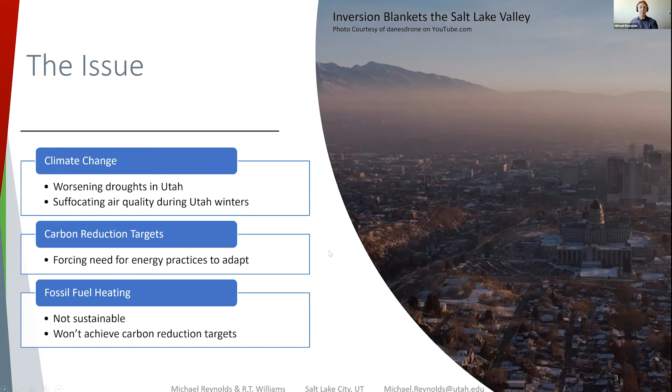So we've focused on cold climate air source heat pumps, which are an efficient variety of heat pumps that use electric energy to both heat and cool. The market narrative around air source cold climate heat pumps has been that they are more expensive and that those do not justify the incremental cost. The Building Technology Office reports an average incremental cost of about $1,350 for a cold climate air source heat pump over a furnace.

The Northwest Energy Efficiency Alliance has published studies from market research showing that decision makers are willing to pay incremental costs for heat pumps, provided they are aware of the technology and its merits, and the simple payback is reasonable. We have found through our work with our partner, GIV Group, that all electric is not more expensive. GIV Group is a local developer that designs, builds, and operates low-income, all-electric multifamily apartment buildings, and their publicly available bid sets show that their electric designs are more efficient and less expensive. Diamond Rail came in at $133,000 less than an identical building with a gas furnace and gas water heaters.

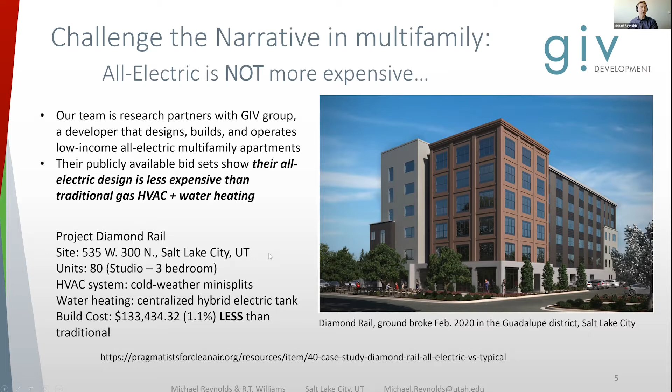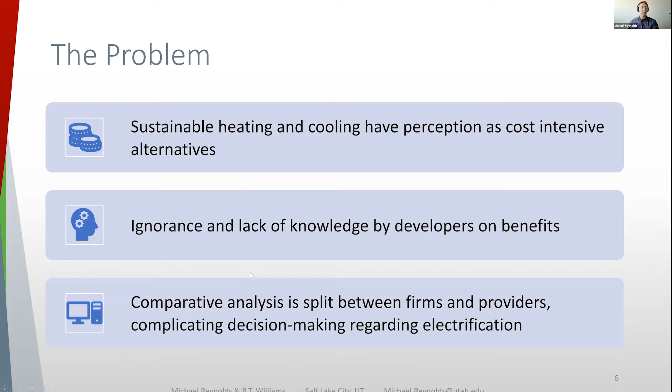The problem we see is that sustainable heating and cooling have a perception of being cost intensive. Ignorance and lack of knowledge of the benefits is leading to a lag in the adoption of this technology, because comparative analysis is split between firms and providers, so they can't make their decision.

Our solution is a consulting service that specializes in electrification strategies, particularly cold climate air source heat pumps and water heaters adapted to the Utah Wasatch Front market.

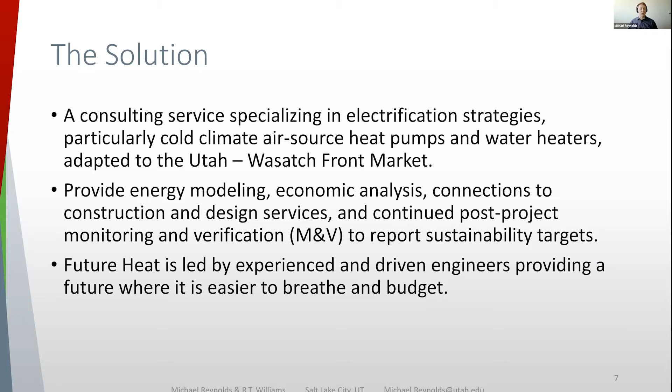We provide energy modeling, economic analysis, connections to construction and contractors, and monitoring and verification services throughout the life of the project. Our business model provides services including conceptual design of electrified HVAC systems using energy modeling and economic evaluation.

We also offer connections to local installers, contractors, and developers, and continued support through the life of the building, including energy certifications and awards. Our price structure will charge a fixed rate for initial consulting and energy modeling, hourly consulting rates for labor on design build, and a tiered subscription service based on the client's needs for continuing M&V.

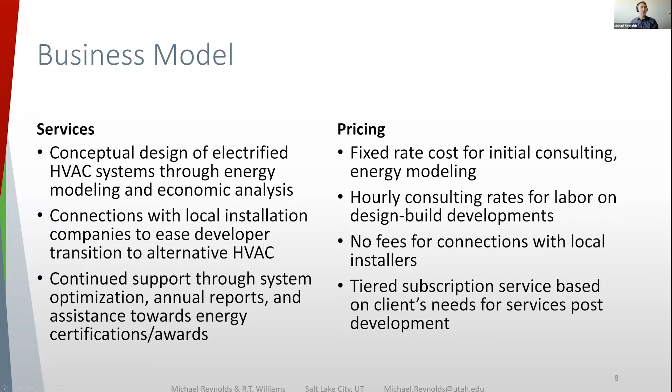We believe we have an amazing market here in Utah. Our real estate market is booming. Research from the University of Utah indicates that about 30,000 residential permits were issued in each of 2020 and 2021, and we see each residential permit as an opportunity to push a heat pump into the market.

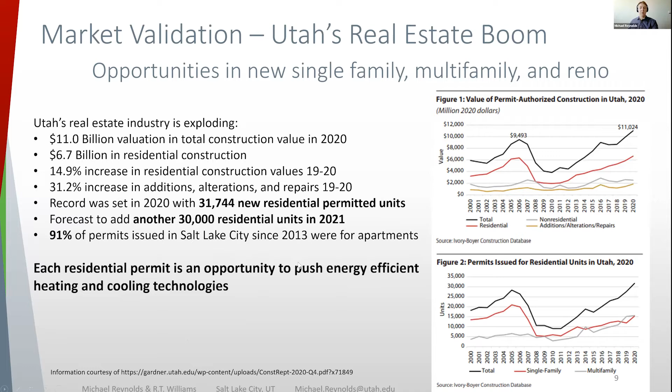We will achieve this by working through our existing partners with the GIV group, the Industrial Assessment Center, which we have on campus doing energy analysis to find more clients, and Rocky Mountain Power, our electric utility, who wants to push electrification in this region. We will work through these existing partners to reach new customers and through professional engineering organizations.

Our competitors are natural gas utilities, for whom electrification is a threat, and our state is very fossil friendly. We also see competition from energy modeling companies who have to be convinced that we bring value to their table. But our advantage is that we fuse economic analysis at every step.

We're asking for $2,500 to continue our travel, achieve the licensure and certifications we need, and for capital for software.

We know that electrification using cold climate heat pumps will benefit city and state officials in their carbon goals. We will all breathe healthier air here in the Wasatch Front. Developers will save cost and streamline their schedules, and low-income owners will pay less in their utility bills. Thank you, we are Future Heat.

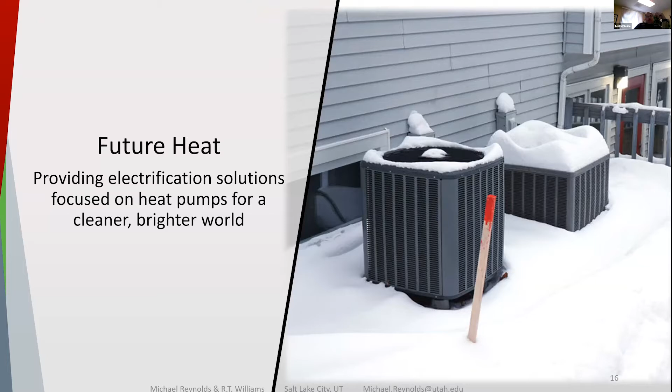This is Ted. I had a question. So your revenue model is that you're going to consult to big developers, individual homeowners, or big commercial buildings. Whoever that is, have you figured out, if I'm an individual homeowner, what's the cost savings versus how much I'm going to pay you? Why would I want to pay you? What's the payback before I make up what I'm spending to have you tell me to put in a heat pump?

Let me show you a case study from my home. This is my home in South Salt Lake, a 1,600 square foot attached townhome. I did this analysis for my home, and my payback is about 12.2 years. I live in a house with 2 walls that have essentially infinite insulation, so I only lose heat at the front and the back because I have 2 attached neighbors.

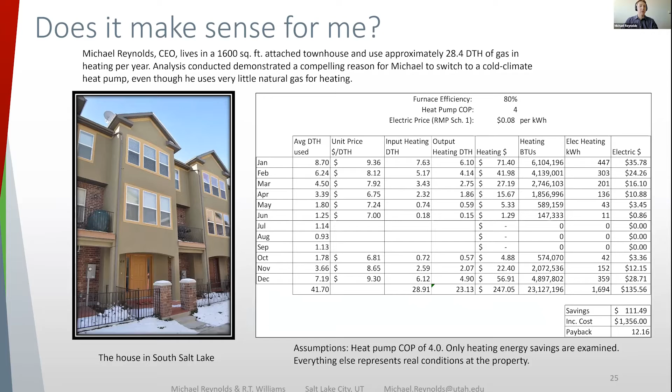For me, that results in a payback of about 12 years, but I don't use very much gas to heat my home. In fact, homes that use just twice the amount of gas that I use would see paybacks of about 6 years. With a payback of about 6 years, we estimate that we can achieve market penetration of between 20 and 25%, even among detached single-family homeowners. The multifamily market makes a lot more sense because the incremental cost is zero. If we can show developers that they're saving money by electrifying their buildings, they're all going to want to go for this. It's just the lack of knowledge that prevents them from implementing.

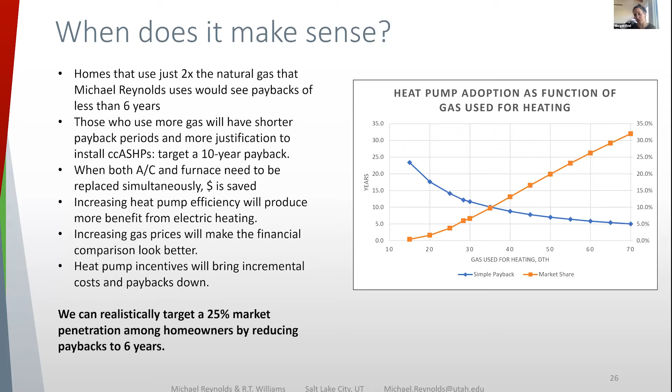I guess my main question is, it seems like there are a lot of different areas that you're starting off with. If you were to pick one market that you feel you could make the greatest impact with, where would you start in order to gain the biggest product market fit and actually get into the market?

I think we would start with the multifamily market because we have a strong relationship with Giv Development. They have case studies publicly available. If you go to Pragmatists for Clean Air, you can find their full construction sets for an identical building that they bid and spec'd through their professional firms, showing their multifamily building was less expensive. We know developers are motivated by initial costs and getting their investment back as quickly as possible. So we feel it makes the most sense to start with multifamily because that's where most of the building is going, and it makes the most financial sense right now.

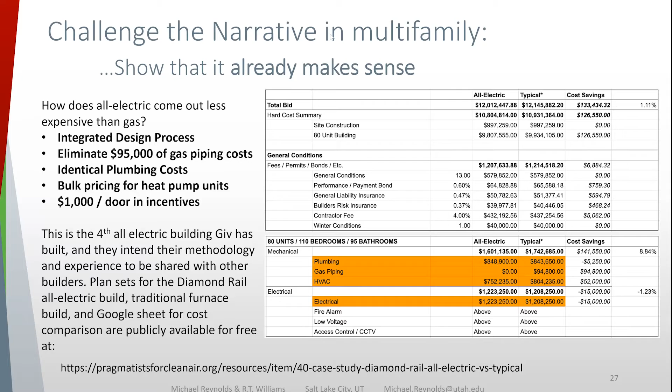Right now we have Azeotrope. Efficiency is a word emphasized throughout the economic and industrial sectors. Currently our global power is driven by crude oil, but crude oil can't even be used without first being refined or distilled. Welcome to the higher efficiency distillation solution, Azeotrope.

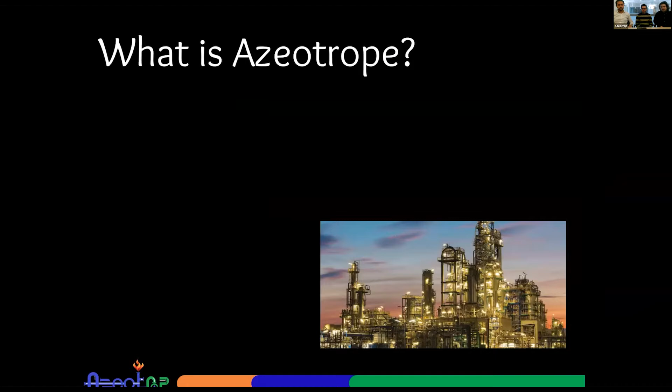Myself and my colleagues have 16 years of combined experience in the field, backing us as we launch this venture. So what is Azeotrope? Azeotrope is a company ready to revolutionize the industry as a whole. We will provide free implementation of our distillation units, and the energy cost reduction will be the profits for both parties. What is distillation? Distillation is the separation of liquid mixtures by controlled increase in temperature.

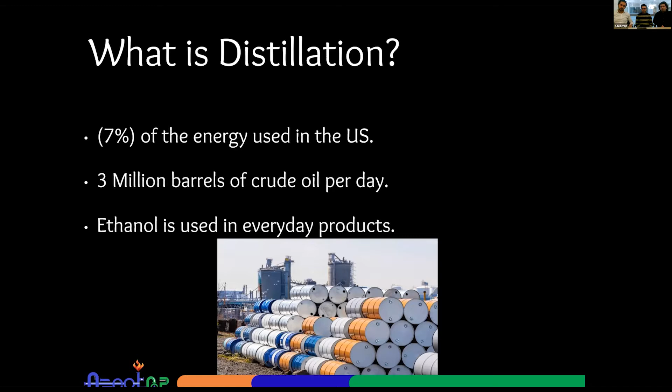It is super energy intensive. In the US alone, it accounts for 7% of our energy use. By day, this is 3 million barrels of crude oil. We can't focus on distillation as a whole, so we're going to dominate the ethanol market to begin. Ethanol is used in everyday products such as fuels, pharmaceuticals, and most recently relevant due to COVID-19, hand sanitizer.

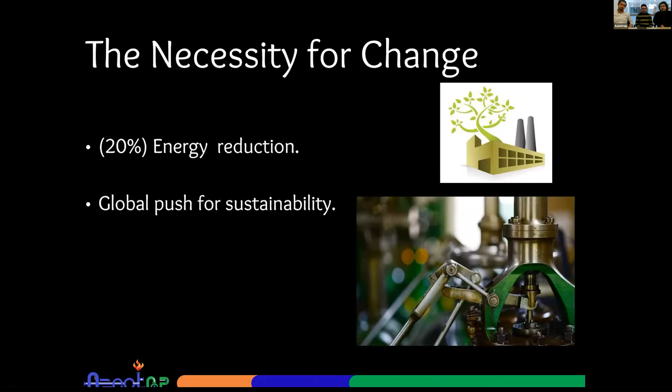So what's the necessity for change? We provide a 20% decrease in energy costs for every distillation process. There's also been a global push for sustainability in manufacturing. Let's put distillation at the forefront. This provides savings for our partners and resources for our children.

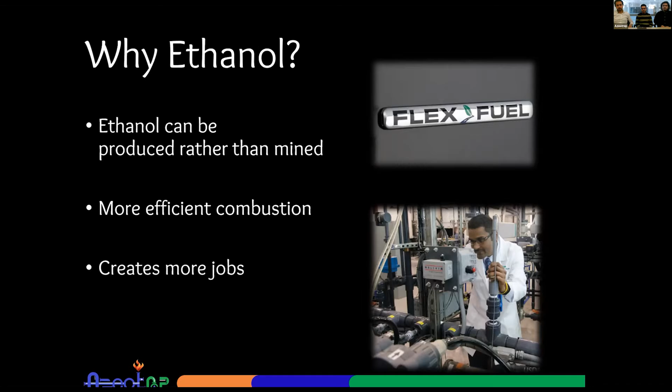Why ethanol, you may be asking? Ethanol can be produced rather than mined, unlike crude oil. Ethanol also provides more efficient combustion. This will create a larger ethanol market, which in turn means creating more jobs. There are also technical reasons to focus on ethanol production, and we can highlight them by looking at the traditional distillation of water and ethanol.

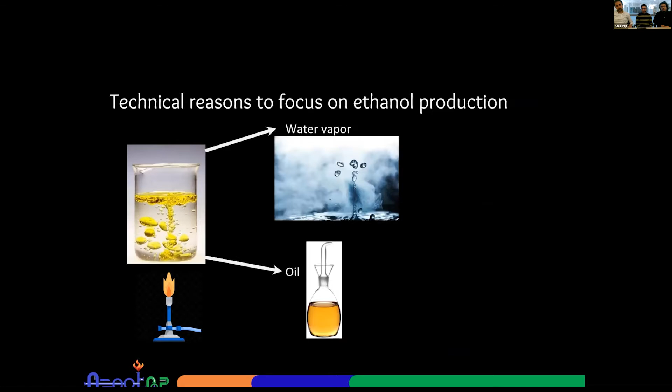Heating the mixture, water will turn into vapor, the light phase, and oil can stay as a liquid, the heavy phase. The situation is different for ethanol and water because they are as light or as heavy, so heating the mixture keeps them in equal proportions in both phases. In other words, there is no change when boiling, or they form an azeotrope, from the Greek.

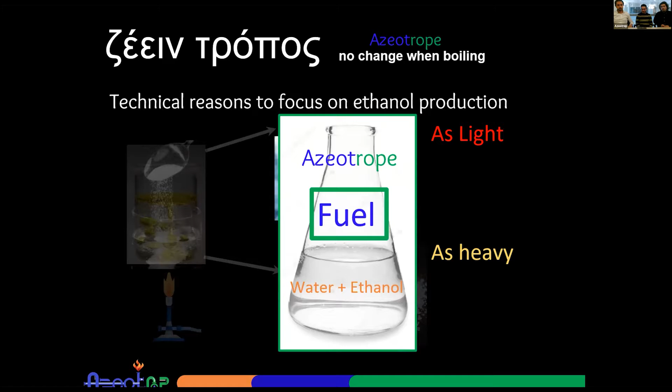As Victor highlighted, ethanol can be used as a fuel, and that's why we need to separate water from the mixture completely. In the current production process, corn is fermented and a water-ethanol mixture is formed. Separating water from ethanol is a complicated two-stage distillation process. That's how azeotrope changes the game, reducing the two-step distillation process into one single stage using our nanomaterial technology, saving up to 30% of the energy used in distillation.

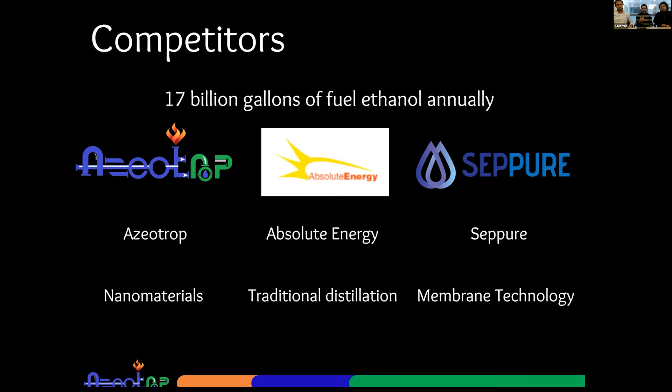The fuel ethanol market in the US is huge, producing an estimated 17 billion gallons. People in the market use traditional distillation or rising technologies such as azeotrope and Seppure. Our deal to the market is simple: we will give them our units, and for a fraction of the energy reduction cost, we will make our revenue. This is estimated to be $40,000 US per month for every unit sold.

So what about our market strategy? With a competitive advantage of being greener and more efficient, we intend to monopolize the ethanol production market segment in the US. According to Statista and Grand View Research, this market is assessed to be $35 billion US. We will use this market to penetrate the larger worldwide ethanol production market segment. In the future, we also intend to penetrate other markets in the chemical industry, such as crude oil distillation and water desalination.

Looking at our climate impact, azeotrope reduces carbon dioxide emissions by 50,000 metric tons per year. Think about it: we take a two-step distillation process, make it one step, and reduce energy consumption by 30%. This is where the climate impact comes in.

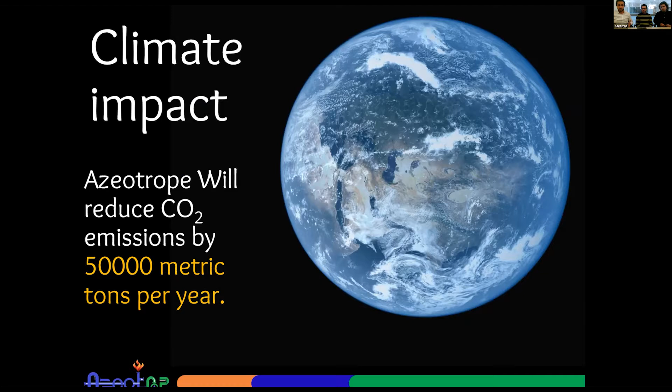So what defines our success? After all, we're a business, and what defines our success is financial stability. Azeotrope needs $3 million US to reach stable and sustainable production of its units. We expect a company value of 6-fold after 7 years of operation. According to our financial study and units being sold, we expect a payback period of 4 years and a company value of $18 million US after 7 years of operation. This number will be increasing exponentially in the years to come.

So what have we already done? We've already won a pitch competition here at the University of Utah. We've also been featured in a prestigious publication, Innovation at the U 2021. We're also in the process of drafting our patent applications with the center here at the U. So take your stake with us today, and let's save the planet one drop at a time. Azeotrope.

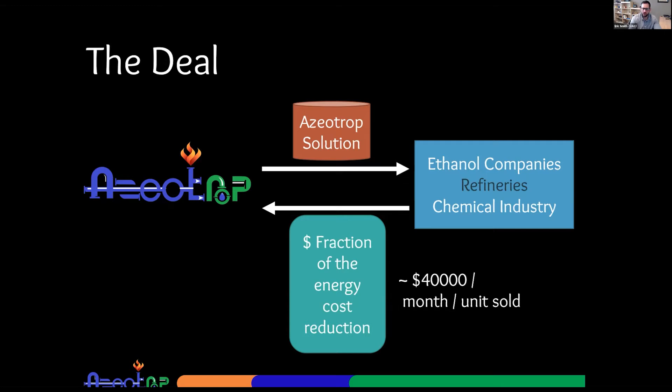In this particular 1 minute, the first thing that I'd like to accomplish is we got to get a picture of everybody, because it's almost 3 years into Zoom meetings, and we're still doing this. And we've learned that when we get pictures of everybody, just randomly snapping one or doing a screenshot doesn't work. So what I'll ask is, if you're comfortable, flip those cameras on. It's like having power, when I can go like this and things happen on my screen. I love it. Okay, Casey's going to be ready with the good old camera trigger finger, and we're going to count to 3. You can give me a big smile. You can make a funny face. You can do whatever. Yes, yes. Peace signs on the count of 3. Ready? 1, 2, 3. I like it. Very nice. Okay, and you are more than welcome to remain on camera or flip back off, whatever keeps you comfortable. I'm just blown away. I think this is the first time in 3 years of doing this where I've asked people to do that, and everybody was ready to go with their cameras on, looking good.

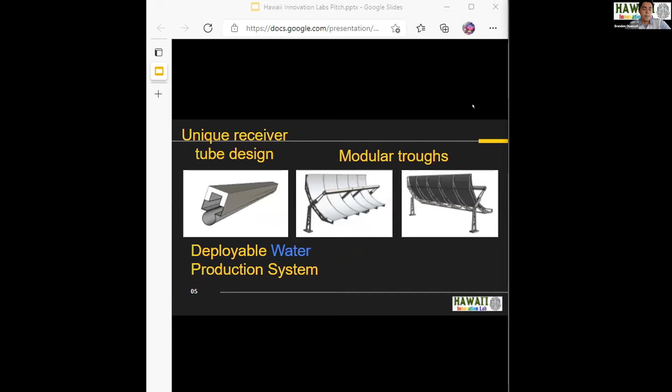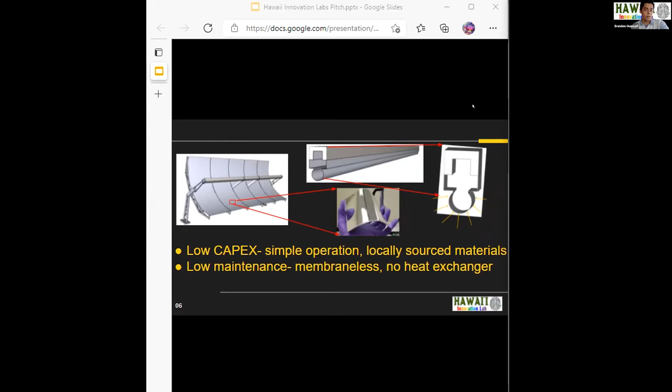We propose a system that will generate water for these refugees, all while being affordable and feasible for camp administration. This system is deployable, allowing for a quick and easy setup wherever it's needed. This system also has a low price point and low maintenance costs, meaning that water production is within reach for refugees. And now, introducing Water for All. Our product is a parabolic trough solar thermal desalination system, where the water evaporation takes place inside a uniquely designed receiver tube, and the vapor is condensed by passing it through a saline water reservoir, generating potable water. The design allows passive heat recovery from the vapor and brine without using any heat exchanger.

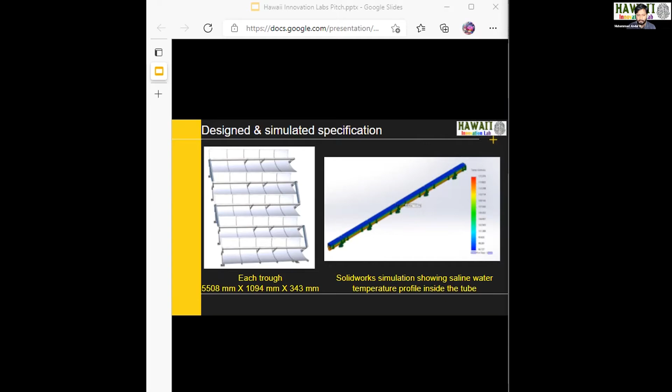A 5-trough plant is designed to produce at least 1,000 liters of potable water a day at 25 liters per square meter of reflective surface for solar irradiance of 4.8 kilowatt hours per square meter a day. The specific water productivity of the system is 5.2 liters per square meter per hour, which is 40% higher than the average specific water production of conventional thermal desalination systems such as MED and MSF.

Our customer segments are coastal refugee camps and humanitarian organizations. We've actually interviewed over 50 potential customers, and many of them have expressed interest in using our product, including the Rohingya refugee camp, whose manager expressed interest in not only a partnership, but also in providing land for the pilot project.

The total available market for solar desalination is $1.84 billion, with a 36.6% share of solar thermal systems. Our serviceable available market is approximately $736 million. Our estimated serviceable obtainable market is $36.8 million per year, which is 5% of our SAM. Unlike most of our competition, our system has no recurring costs. It's entirely off-grid, and it's easily deployable, being able to be set up within a day.

Competitors in this industry compete on the fronts of production and price. And as to be expected, high-cost systems produce large volumes of water, and low-cost systems produce low amounts of water. The gap in the market is right here. There are no low-cost systems that are also high producers. And this gap in the market is exactly where Water for All is positioned, costing as little as $3,600 to consumers and producing 1,000 liters of water per day.

Our profit margin per unit will come out to $1,200. And if you'd like to know more about this number, I would be more than happy to talk with you about it. Our revenue model is sales in North America and Europe and licensing in Asia and Africa. We plan to charge 20% royalty, generating an annual licensing revenue of $30 million. Our estimated annual income from sales is $6.8 million. And in the first 10 years of commercialization, we estimate to capture the serviceable obtainable market of $36.8 million.

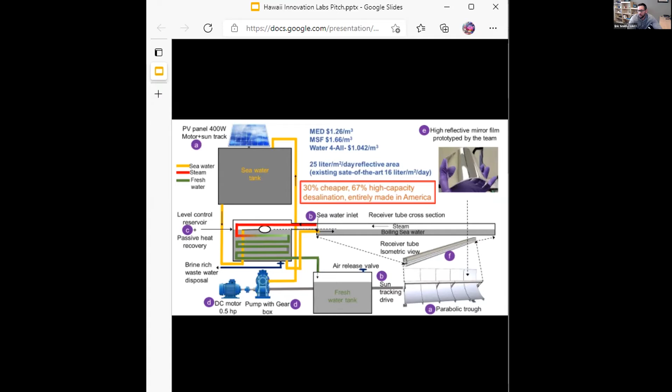All right, and that's all the time we have for Q&A. Well done, Hawaii Innovation Lab, and we're going to give 1 minute for the judges to write their notes.

And I will give you another dad joke. And I like this one. This one's real bad. So what do you call a factory that makes okay products? A satisfactory. Huh? All right. Well, I saw the Hawaii Innovation Lab guys laughing. That's got to count for something, right, judges? So okay. Very good.

All righty. Welcome and thank you so much for having us. We are Revolute Robotics, and we make inspection robots for inaccessible places. Robots have many advantages, from speed, accuracy, and mass data collection. But what you may not know is that robots have flaws too, specifically in the indoor environment.

If you've ever flown a drone, I'm sure you can relate to getting 15 minutes into your flight before the controller starts beeping at you asking for a battery swap, thus significantly decreasing the distance of each mission. This has happened to me personally many times when I'm trying to take video and can't fully complete what I'm trying to do. What's more is that they are extremely difficult and dangerous to fly indoors and typically require a skilled operator with a stack of certifications larger than a phone book to do so successfully.

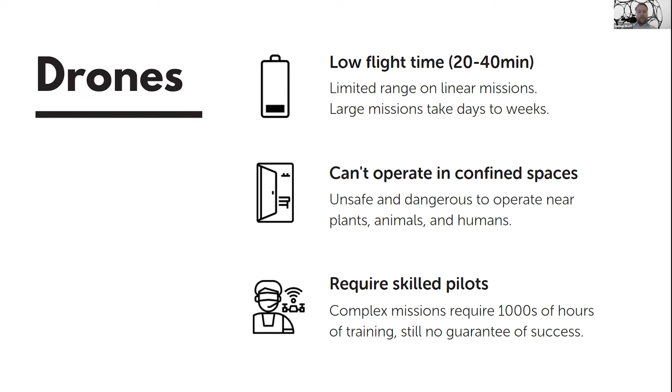Rovers, on the other hand, present considerable improvements to operating time and ease of use, but this comes with its own set of drawbacks. Their large size and low mobility means that any obstacles or uneven terrain greatly limit the robot's areas of application. Our solution is to offset those robots' limitations by combining their capabilities.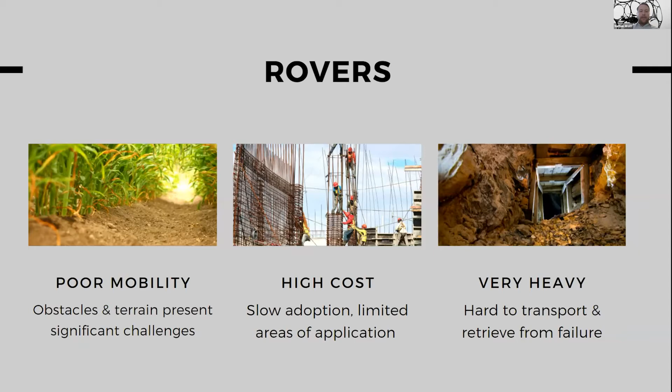Our robot's spherical design and ability to both roll and fly will allow it to safely operate in confined spaces to collect data where other robots cannot travel. The ability to roll gives it an operating time of up to 10 times that of a typical drone, which significantly increases the distance and duration of each mission.

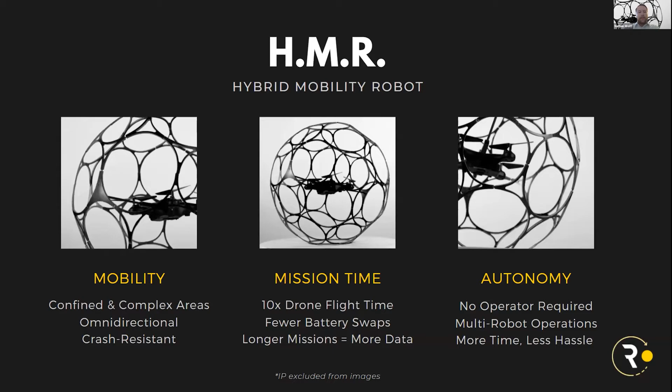Our robot will also feature fully autonomous operation to eliminate the need for human interaction. And you might be wondering how it's done. Simply put, our robot is comprised of a multi-rotor mounted in our patented stabilizing unit inside of a protective shell. It can be equipped with any mix of cameras and sensors to collect mission-specific data for different industries.

Although many industries can benefit from this product, the most immediate demand lies within the energy sector, with up to 30% of a building's energy expenses being wasted on air leaks alone. It's estimated that around $2.9 billion are lost every year due to duct leakage. Our robot is the perfect solution to solve these challenges.

Because our robot can switch between rolling to save energy and flying to travel vertically, it can navigate places that are off limits to any existing solution. Equipped with a thermal camera, it can identify air leaks and other anomalies that waste energy and contribute to harmful greenhouse gas emissions. Not only can it detect leaks that are otherwise undetectable, it can also repair them by using a sealant spraying mechanism. Here's a short video to illustrate how it would maneuver through an air vent.

Our robot allows us to detect leakage much more effectively than any existing solution. Repairmen with thermal cameras have to scan room by room. Retractable cameras, also known as snakes, that can be pushed through the vents, have very limited reach. And rovers can only travel one floor at a time, provided there are no gaps in the floor. But our robot is able to scan multiple floors at a time fully autonomously.

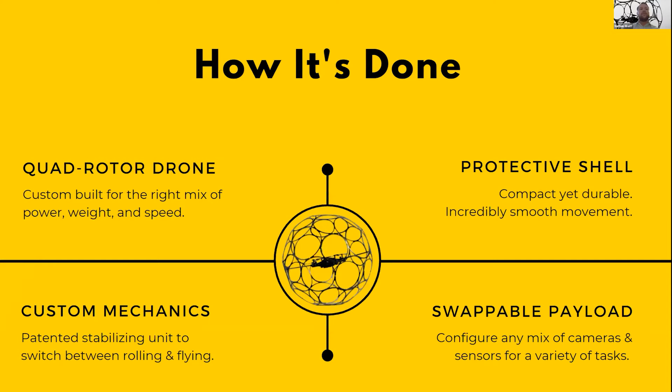Perhaps I missed it, but what would one of these systems cost, or what's your ultimate price point? Yeah, so the cost of production is around $2,900, and the sale price we would be going for is $4,800, with a data subscription of $1 per mile autonomously through the ducts, and a service warranty of $300 per year. You can buy it all outright as a direct sale, one-time production cost, or you can do a lower upfront and shorter sales cycle and make payments.

All with a monthly data subscription and service warranty.

How does that compare to current options like the snakes and so on? Our solution is the only autonomous one, so you wouldn't need a repairman to come and actually inspect the ducts, and they usually charge around $75 to $150 per hour depending on the company. With our robot being autonomous, it can go through the ducts by itself, and it'll have a sealant spraying mechanism to patch the leaks.

You wouldn't have to have somebody control it, or is it completely autonomous, like there's no human intervention? It will be controllable on its own with joysticks, like a standard controller. The autonomy would be once it gets into the air duct, then it will be able to navigate and avoid obstacles. So some initial supervision would be needed. And is that built into your pricing model?

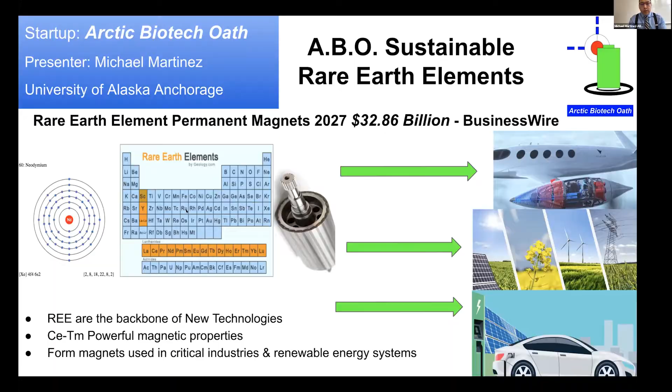Conventional methods, especially current mines and other rare earth element projects such as Mountain Pass, BRAIN Xtractor, and Medallion Resources up in Canada, use acid leaching conditions which may cause acid mine drainage, such as has been seen in the Colorado River watershed. If we keep seeing these methods applied and these spills happening concurrently, we're going to be destroying the freshwater sources of the United States continent.

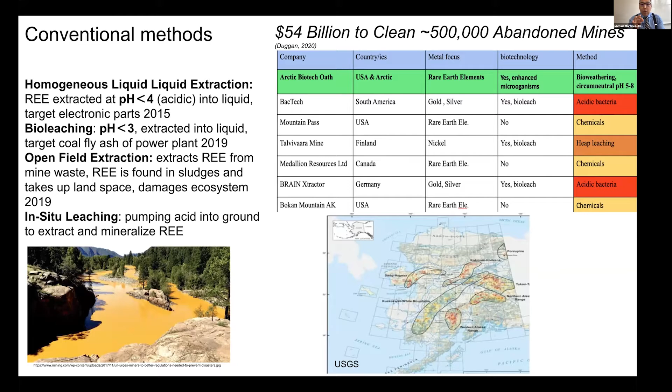So what we're proposing is biomining and bioweathering that operates at pH 5 to 8, circumneutral pH, targeted for the yet-to-be-established rare earth element deposits right here in Alaska in the Arctic. You can see in the corner, our technology actually works: the bacteria grow, proliferate, and extract the rare earth elements from these different mineral feedstocks.

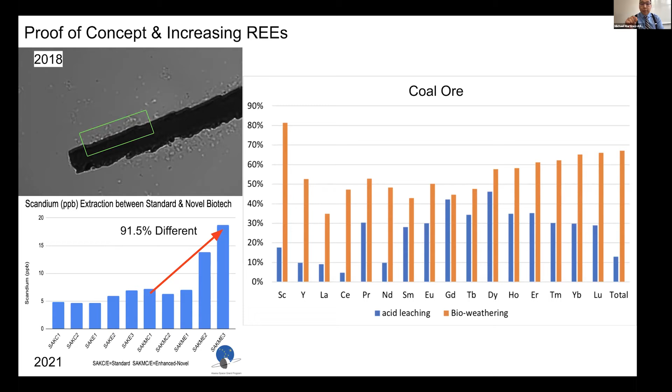What separates acid leaching done by conventional companies from bioweathering is that acid leaching occurs in set acidic pH conditions, whereas bioweathering allows the bacteria to grow exponentially and multiply, and since they are living organisms, they need these minerals to survive even in harsh conditions. Comparing the two, we can see that bioweathering outperforms and is superior to acid leaching methods.

We plan to integrate this into a $3 billion headquarters facility here in Alaska, about 500,000 square meters, to extract, refine, manufacture, and recycle these rare earth elements, with the help of other DOE patents and scientists such as Bhave, Schneidner, and McIntyre, with our biomining extraction method taking ores, tailings, wastewater, and used rare earth elements to make the final rare earth magnet products for US technology industry partners. The goal is to create 3,000 jobs for Alaskans, and to integrate robotics and automation so operations run 365 days a year.

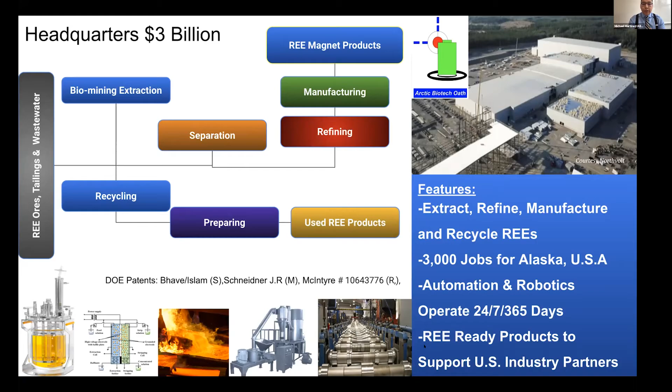So what are we looking at exactly? To give an example, with the new White House announcement, the Buy Clean Task Force is going to be looking to buy American-made products. Where will these go? If we look at the electric vehicle market by 2030, that's going to be worth about $823 billion, and the aerospace industry by 2030, about $1.25 trillion.

By establishing one-on-one collaborations with, hopefully in the future, these US technology partners, we will make sure that their magnets are up to grade, don't degrade in their actual devices, and that these products are made sustainably.

I saw Cody there earlier on deck. Hi, I'm Cody, engineering master's student at the University of Washington, studying ultrasound at APL Center for Industrial and Medical Ultrasound. My teammate Lloyd is a master's student at the Foster School of Business, studying technology commercialization. With our team, Ultropia, our mission is to foster global accessibility to sustainable laundry by using ultrasound technology to make laundry appliances significantly more efficient.

There are 5 billion people who still wash clothes by hand. The US is one of a handful of countries where washers and dryers are standard issue. Even die-hard environmentalists don't give up their machines. The problem is our current appliances: they're resource hungry and highly polluting. US washers and dryers produce 179 million metric tons of CO2 annually. That would take half the trees in the US to keep up with.

We've spoken with people all around the world about their laundry needs. Extreme poverty and a lack of infrastructure are huge barriers for many, but surprisingly, even developed countries have limited access to washing machines. Our team's business lead, Lloyd, has family in Fiji that need an entire day for the labor-intensive task of doing the family's laundry.

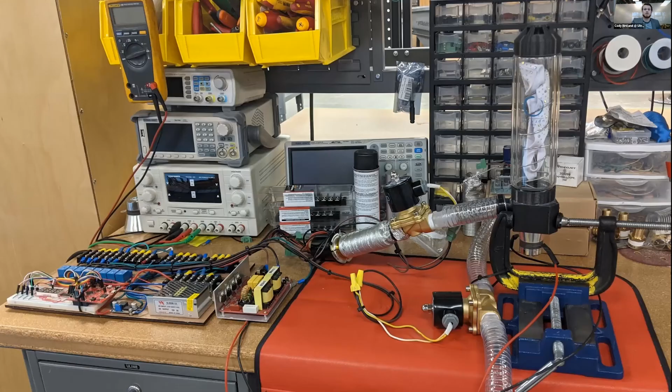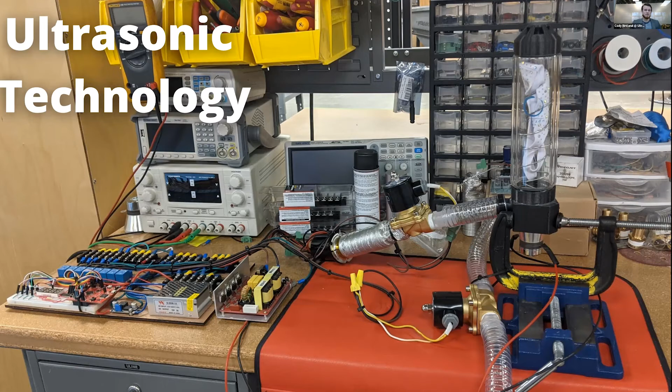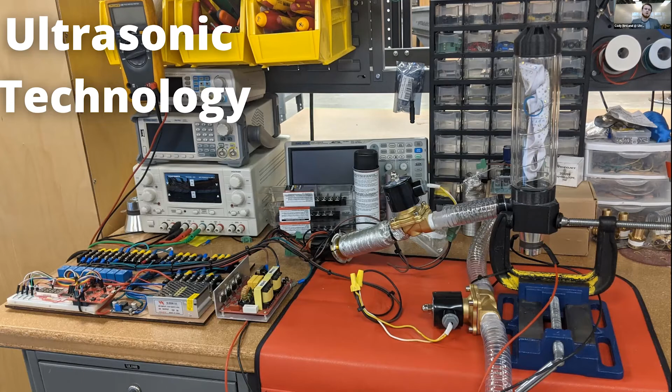Our solution uses ultrasound technology to wash as well as dry clothes. Cleaning works by using ultrasound to drive the creation of vacuum bubbles that, upon collapse, gently expel dirt out of clothing. The drying process uses ultrasound to atomize water droplets, reducing the heat required. We're taking learning from the ultrasound lab and combining it with ultrasound drying research developed at Oak Ridge National Labs to create the world's first ultrasonic washer and dryer. We've translated this research into a tabletop version that uses our technology to wash and dry small items. The technology has diverse applications, and commercialization of smaller versions will support our long-term development.

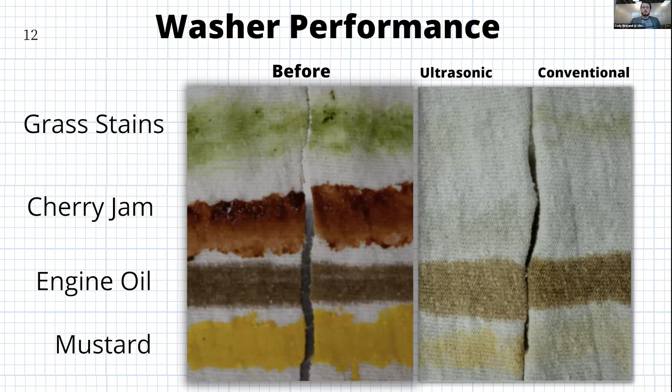We've compared our ultrasonic cleaning to conventional washing machines. As you can see, the results are fairly similar. The real difference is in the resources used. Our bench tests for washing show faster cleaning, less water use, and significantly less total energy compared to a modern mid-market washing machine. For drying, we're building on research from the Department of Energy and Oak Ridge National Labs, which shows drying in 7.5 minutes with 5 times efficiency gains over forced air dryers.

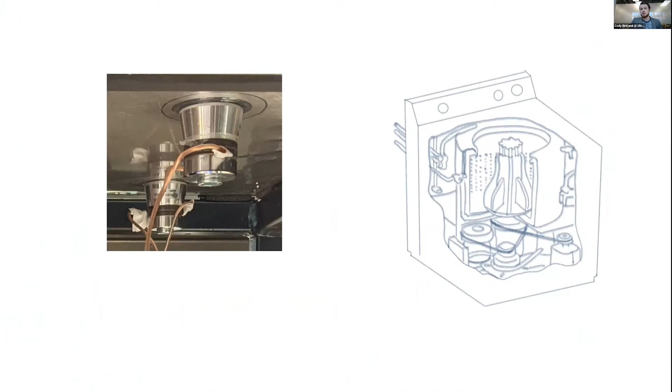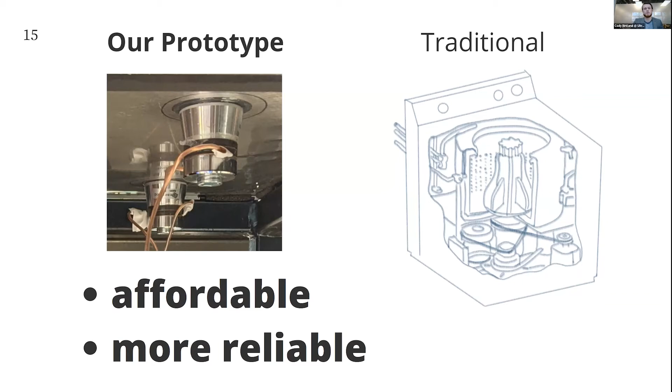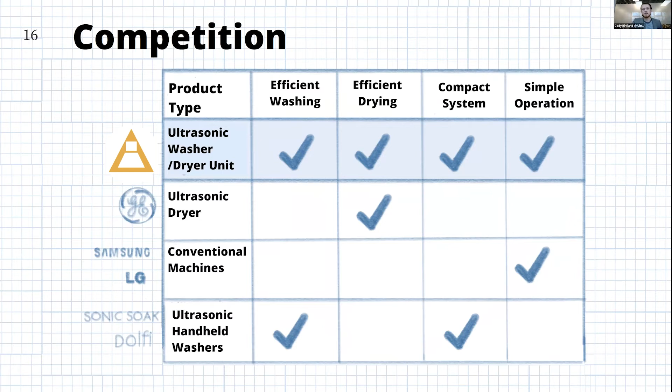This technology uses fewer moving parts, enabling our design to last longer. It also allows us to create a compact, all-in-one unit that will be more affordable to manufacture and ship. High efficiency allows us to offer a configurable water supply and compatibility with a standard wall outlet to foster accessibility for resource-scarce communities. We're challenging GE and Samsung with our all-in-one product that is 1/3 of the size and moves beyond the expensive, damaging rotary drum. Other ultrasonic cleaners are on the market, but our product is unique, using ultrasound to wash as well as dry clothing, saving water, energy, and time.

We're opening up new markets, starting with providing access for the millions of Americans who do not have in-home laundry. Globally, the market is big, $66 billion, growing by 34% over 5 years. We're pushing to get to market in time to meet this surge in demand and prevent the resulting increase in pollution.

Hardware has high initial costs, but laundry is a universal problem. Our plan is to start in the luxury market with high-end consumers who care about their eco footprint and need a compact laundry system for their urban lifestyle.

Our research shows that these consumers would be willing to pay $1,500 a unit to address their needs. From there, we can scale our manufacturing to reduce product cost to around $500, allowing us to sustainably meet the growing global demand for washers and dryers.

We will work with the Alaska Native Tribal Health Consortium to get user feedback, as they have expressed a need for a resource-efficient washer and dryer. We're developing our product at our university's CoMotion Labs, which has the resources to connect us with people to manufacture our product. After gathering user feedback and establishing manufacturing connections, we will launch our product through a crowdfunding campaign.

Commercializing this technology can change so many lives. Laundry appliances are considered essential infrastructure in the developed world, but the current processes are simply not sustainable. Changing the way we do laundry will make hygiene a part of the energy transition and enable a global standard of living we all want to share.

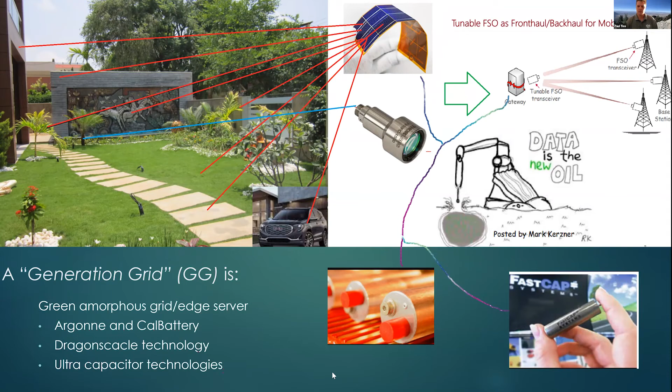Good afternoon, we are the software team, and today we'll be presenting our smart air particulate matter monitoring software. In today's world, air pollution is a big problem, and given that 90% of Americans spend 90% of their time indoors in their homes, we want to address this problem of how to effectively manage air quality inside a building. With current global problems like wildfires and the COVID pandemic, about $1 trillion per month globally was wasted on poor air ventilation. This also decreased the productivity of people, and it costs up to billions and trillions of dollars for the United States.

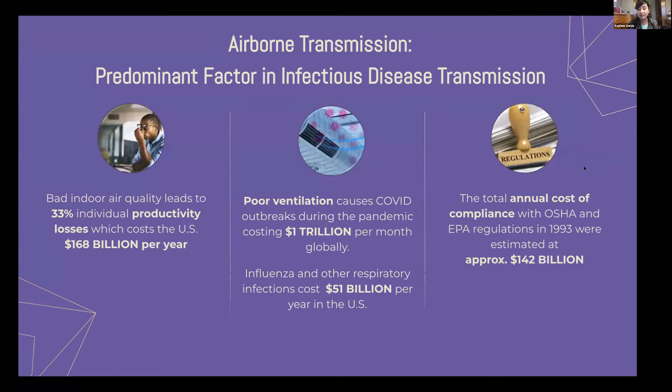To be a little bit more specific, building engineers have certain pain points of figuring out when to let outside air in and when to recycle the air inside of the indoor environments using their HVAC systems. These complex factors are quality of air and figuring out the energy cost of this exchange process of clean air versus dirty air. Our consumer survey focused on 150 potential customers, and a lot of them were also industrial hygienists who helped us with the industry partnership and figuring out what the pain points were. 100% of these participants agreed that they needed a solution for more informed decisions, reduced energy costs, and maintaining a healthy environment for everyone in their building.

So with all the insights we collected from our consumer survey, we also talked to industrial hygienists, and from years of research at the lab of Professor Alexander Mamishev, we are building our solution software. The software combines the power of IoT, machine learning, and AI to build a data-driven intervention method, which can monitor aerosol concentration in real time, and it can alert users when the levels are high. The software smartly integrates into existing HVAC systems and sensors in the building. Data collected is transferred to our machine learning cloud, and users can then access data from the web console or mobile application. Our mobile application and web portal are intuitively designed for the customer to get the exact feel of where the sensors are placed.

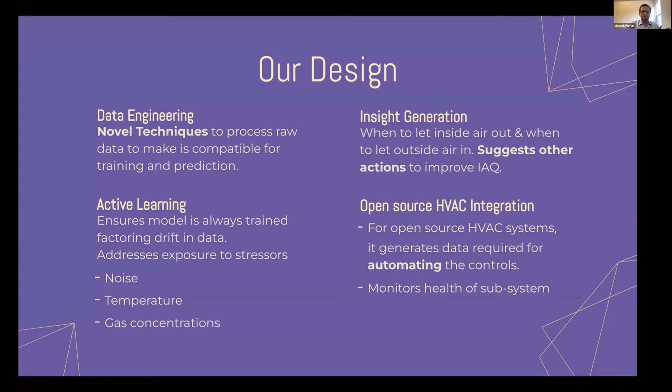The insights which we generate are targeted towards when building engineers should let air in or let inside air out. Also, they will get more suggestions on actions which they could take to make this process more sustainable. We are also working towards integration with open source HVAC systems. There, our target will be monitoring the health of the system, because if a subsystem goes bad, it contributes to large energy consumption and it is not good for our environment.

Also, in the short term, we are focusing only on the software, but in the long term, we are also targeting buildings which don't have any pre-installed sensors. So we have partnered with GQ Electronics to work out a solution, and we will be building novel methods for exposure assessment based on real-time, hyper-resolved, distributed, low-cost sensor networks.

The slide got stuck, sorry.

Our aim is to reduce energy cost by 20%. We have validated this data through our experimentation in UW School of Dentistry, and initial results are very promising, and we are still working towards improving these numbers. This creates a value proposition for both the people inside the building, creating a healthier environment and bettering productivity, along with the enterprises, reducing their workers' sick days and also reducing the penalties for OSHA and EPA assessments, along with reduced energy costs through the HVAC automations.

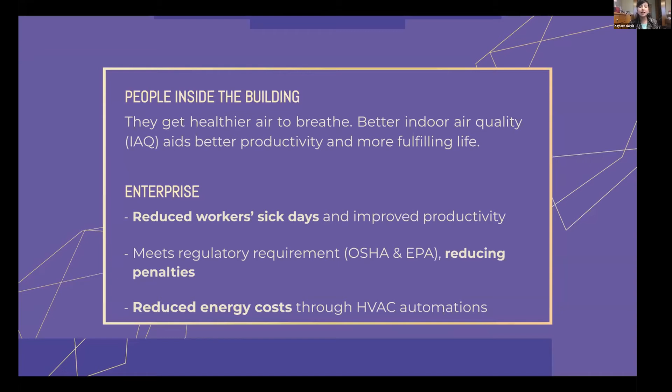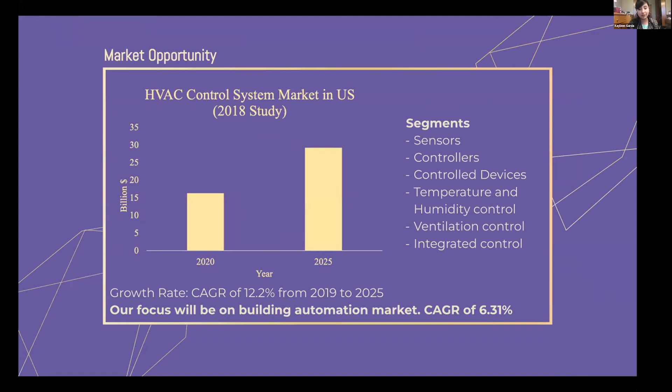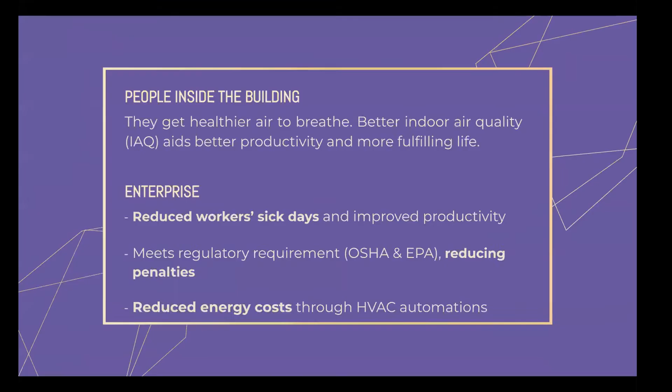Yeah, so there are multiple factors, and we talked about active learning here. Drift can be because of sensor aging, and it also can be because of seasonality. So our algorithms are designed to factor in those kinds of drifts. And Nathan, if you're here, you can take this question a little further. Yeah, so one of the positives of the actual hardware is that it is very cheap to manufacture, so it allows buildings to have a whole system of sensors rather than just one expensive sensor. These sensors are able to communicate through the cloud. And on the software end, we have an AI program that is monitoring these sensors, and it is able to determine when one of the sensors is starting to drift and will recalibrate the sensors.

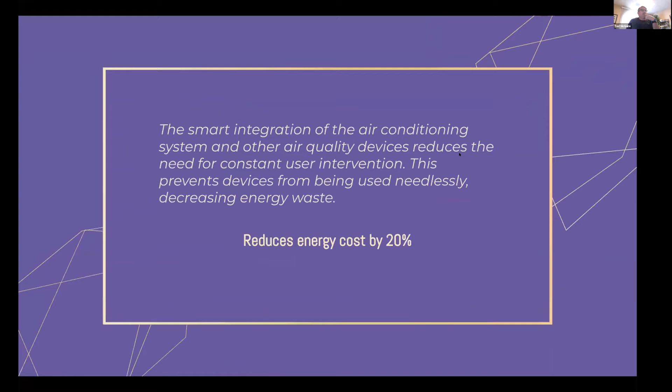Yeah, one thing which sets us apart is the subscription-based model, and our sensors will be very low cost, and also the software can integrate with existing sensors. So companies will not be bearing any hardware cost, and they will be paying a subscription cost based on the number of sensors they have. So it is quite flexible based on their needs. Okay.

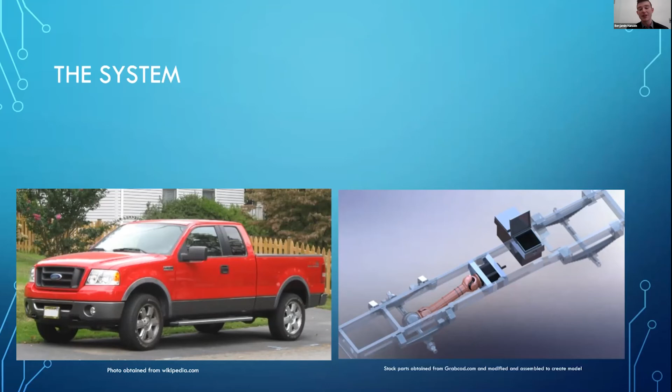And as you can see here in this diagram, I've got a motor hooked up. It simply gets mounted to the frame. One end connects to the engine, one end connects to the axle, and batteries can be mounted in a toolbox in the truck bed. This makes it so that on long road trips, you simply need to fire up the engine. You can drive as long as you want. But on your daily commute, where most drivers use most of their miles, they'll be able to run it fully electric.

Another difference is how we plan to reach the customers. There are currently thousands of dealerships in the US selling used vehicles. We plan to partner with these dealerships to give them a competitive edge as the demand for electric vehicles continues to grow. They'll be able to take the vehicles that come across their lot every day as trade-ins and convert them to electric vehicles. Consumers, in turn, will be able to purchase these vehicles and possibly even receive tax credit to help offset the cost.

Now, of course, there is competition like with everything. However, the competition is a little different. Obviously, the Tesla and Nissan Leaf have a much higher price tag. And other conversion kit companies, such as EV West, target more towards the do-it-yourself car guys who are building hot rods or want a project. An example of our system, on the other hand, would be a $4,000 F-150 with the $4,000 conversion kit, totaling an $8,000 electric truck. It's obviously going to appeal to a different demographic than other EV companies. On top of that, as a side bonus, the combination of the engine and the motor will add performance to the vehicle, giving it even more appeal to customers.

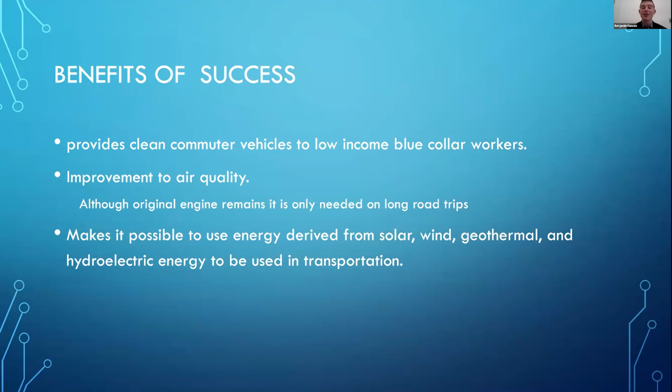The great thing is if we're successful, we'll be able to provide clean commuter vehicles to low-income blue-collar workers across the country, improve air quality, and make it possible to use energy from solar, wind, and geothermal in your everyday transportation.

Another advantage that helps us over other large startups is that it relies on existing technology that's relatively simple. After we build our first prototype, we simply need to find partnerships with dealerships, and then we can start shipping them the hardware. I know this plan has enormous potential, and if it succeeds, it will provide people all across the country with access to affordable electric vehicles.

And that's all I got. So I guess we can go to questions.

Great, thank you, Benjamin. Questions from the judges? I'm wondering, Benjamin, have you tinkered with trying to do any of this stuff on an old used car right now?

That's sort of what I'm working on right now, building this prototype. I want to start with F-150s and Ford Rangers, just because they're very common. It's not completed yet, I'm still in the design phase, but eventually I'm getting my Ford Ranger to be built fully electric like this.

You're gonna add it to your own Ford Ranger? Oh, cool. When do you plan on trying to do that? Just wondering. It'll be over the summer. Oh, this coming summer? You'll have to take a picture. All right, let us know how it turns out.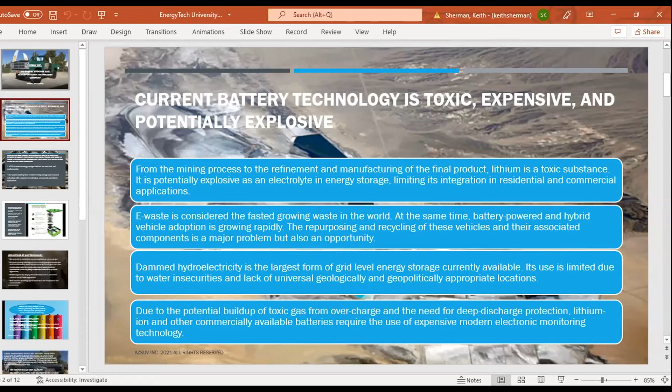I've got a joke prepped, so I'm going to keep at it until somebody yells at me in the private chat. This one's pretty short, simple, and sweet: I don't trust those trees, they seem kind of shady. It's my dad joke.

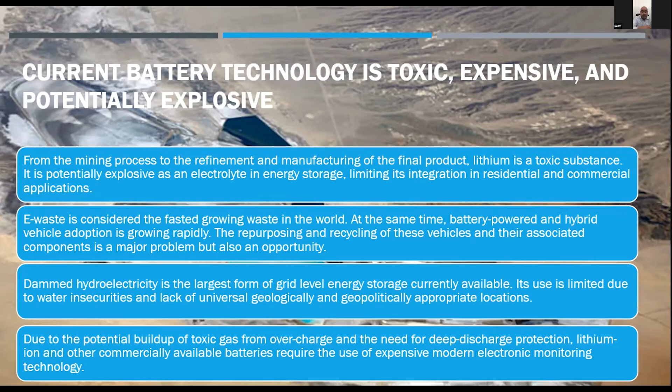So who could benefit from this technology? Anyone who utilizes modern transportation technology could be positively impacted. What we are developing is an aqueous sodium ion battery technology, which is non-toxic and non-flammable. In addition, we are creating patent pending technology: shear resistant and structural energy storage technology for individual, consumer, and military applications.

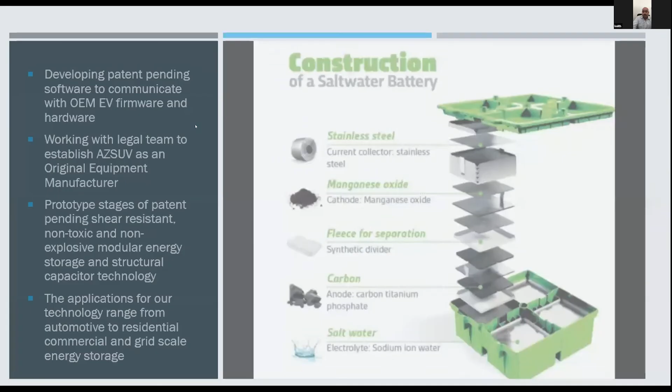This is an example in construction of a saltwater battery, similar in construction to a lead acid battery, but without the toxic elements. We're developing patent pending software to communicate with original equipment manufacturer firmware. Our legal team is establishing AZSUV as an original equipment manufacturer for the auto industry, and we are currently in the prototype stages of our shear resistant, non-toxic, and non-explosive modular energy storage and structural capacitor technology.

So where and what are the types of applications for the technology? The application for our sodium ion technology can range from a home system to grid scale energy storage. For grid scale energy storage, the application I've found is a salt cave. Salt caves are currently used for petroleum and natural gas storage, but we could either create new salt caves or utilize existing ones to store our batteries. It's scalable from a small home unit, and with the shear resistant technology, the applications can extend to automotive as well as military uses.

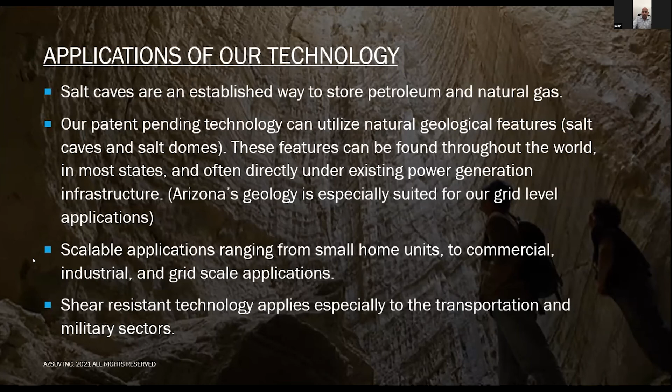There are some companies right now producing sodium ion battery technology, but it's still very much in the developmental stage. One company, Blue Sky Energy, does have commercially available products, but they are not available for the next 6 months to a year.

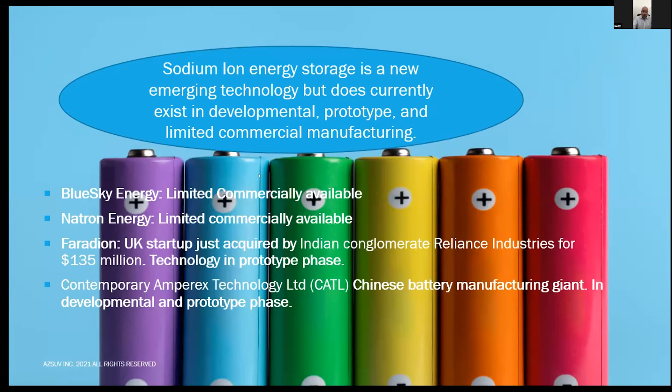So the novel application of this technology is the automotive sector. What AZSUV currently does is identify vehicles, primarily Ford Broncos and Ford Mustangs, and we remanufacture these vehicles, currently with internal combustion engines. However, we are looking to transition towards electric vehicles by utilizing existing battery and electric vehicle technology found in vehicles like the Ford Focus, the Ford C-Max, and Teslas. The reason Ford products have been identified is that the electric vehicle components can be acquired at a fraction of the cost of new vehicles.

And the structural battery storage—think about the panels of the vehicle. We're looking to replace the panels with structural energy storage capacity, so the panels themselves are not only batteries but also designed for safety reasons, for impact resistance, where with shear resistance, when the batteries are impacted, they actually get stronger.

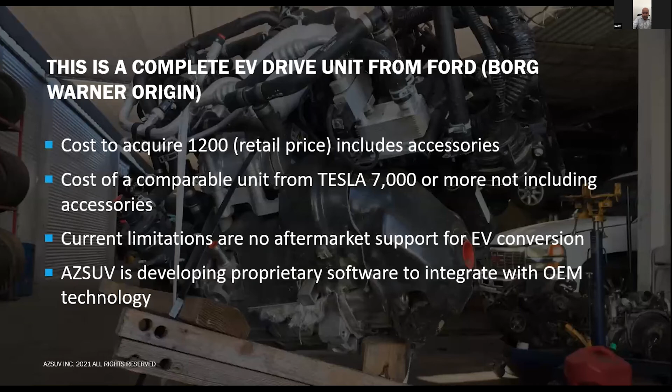This is an example of a drive unit from a Ford Focus Electric. The engine, transmission, everything is there, and it can be had for $1,200, whereas comparable Tesla units are $7,000 or more. So right now we're building essentially brand new internal combustion engine vehicles for $10,000 to $15,000 per unit. When we look to manufacture these vehicles with new electric drive components to integrate our battery technology, we're looking at a price point of $45,000.

When it comes to the actual locations where we want to be, we've looked at several historically manufacturing sectors like Baltimore and Newark, New Jersey—places that still have the infrastructure and access to talent, but are in an economically deprived situation that a large energy manufacturing facility and project like ours could help revitalize.

So I'm an undergraduate student pursuing a degree in information science and e-society at the University of Arizona, with a long history in automotive manufacturing and fabrication. As for my team, I'm still looking at bringing in additional folks. I have some people on board in an advisory capacity, but they are not currently students.

So that is AZSUV and our patent pending battery technology, scalable from everything from a home setup to commercial, automotive, on up to grid scale energy storage. So thank you for your consideration.

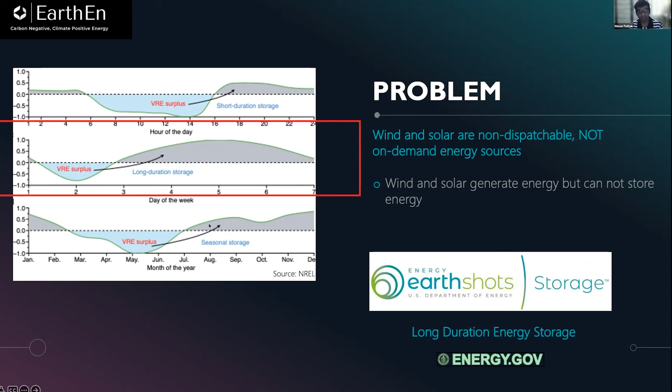How do we solve it? Welcome EnergyPod, EarthEn's patent pending carbon negative to neutral technology that takes excess energy from the grid, stores it, and dispatches it back to the grid for longer durations. I start from 6 hours plus when I say longer duration, but we can go all the way from 10 hours plus to 24 hours. Highly scalable and highly modular, with no geographical or geological constraint in deployment of EnergyPod. The levelized cost of storage that we target is $40 per megawatt hour, compared to lithium ion in 2025, which will be $100. We sell EnergyPod at 1 megawatt capacity for $1.3 million with a 30% margin.

What is EnergyPod? Double-clicking into it, you have 2 modular systems. One is called Energy Conversion Plant, or ECP, that sits on top of HPS, heated pressurized storage. ECP's job is to convert stored energy back to electricity - this is where the patent pending IP comes into picture. HPS's job is to store energy in the form of heated, pressurized, supercritical CO2, which can be stored underground for gigawatt capacity or on the ground for megawatt capacity.

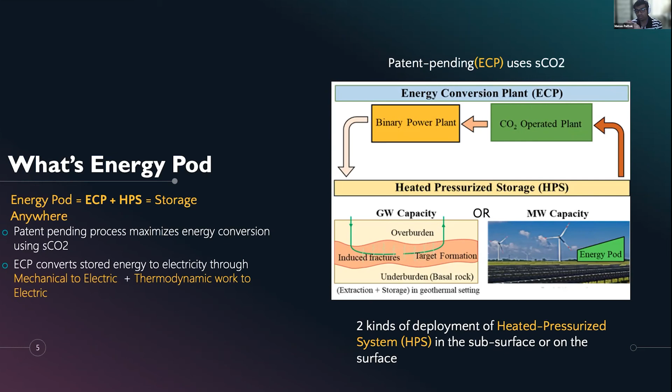It works very easily. At 12 p.m. at noon, when you have excess energy, give it to us. We will store supercritical CO2, pressurize and heat it inside the pod, store it for you, and then give it back to you, say at 11 p.m., by our patent pending conversion technology.

Market opportunity: the overall global renewable energy market is $1.5 trillion TAM by 2025. We focus on the beachhead US energy storage market, which will be worth 8.5 billion by 2025. Long-term opportunities come as entire states in the United States are converting and adding LDES, long duration energy storage, to their portfolio, and short-term opportunities come from companies like Google and Amazon bringing in the technology so they could be 100% renewable and achieve their 2030 vision.

Revenue model: we sell energy storage as a service to utility providers like SRP, to enterprise customers like AWS, to solar and wind farm developers, and last but not least, CO2 capture plants, which are very power hungry. The second category of revenue stream will come from capacity market and ancillary services. We are already talking to a local utility provider, and this is all backed by customer discovery calls.

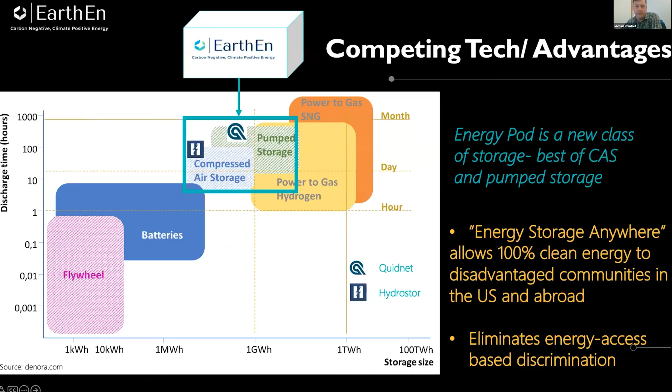Manas, can you clarify? You mentioned energy storage as a service, but then you also said selling your units. Can you maybe clarify your business plan a little bit?

For enterprise customers or small structures where there's only a megawatt level deployment, we could sell the Energy Pod to be installed at their premises. For larger customers with gigawatt level energy storage requirements, like utility providers, we won't install it at their premises, but we'll sell it as a service. We'll have our own premises where we install these series of modular Energy Pods and provide it as a service.

So you would have units that you could sell, but then you'd also have essentially an end storage plant, for lack of a better word.

Yeah, we figured very quickly the beachhead we could go after is going to be either the enterprise small hospitals, enterprise customers, or solar farm developers. So right now we're trying to do this pilot in 2022, not as a service, but selling that Energy Pod—piloting a 0.1 megawatt capacity unit, which in an ideal world would be sold for $1.3 million. It's a 30% margin, so we're talking about like 926K or something like that for the cost.

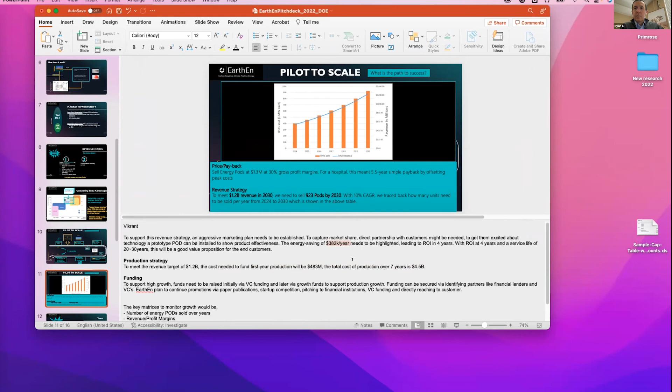That's great. So this was an overall $382,000 per year energy saving, and that's how we calculated the simple payback. Again, it doesn't show the cost of electricity, and I don't want to say what I don't recall right now, but I can get back to you, Ryan.

If you shoot me an email, it's in there. All right, thank you.

Any other questions? I saw in one of the slides it said you're in negotiations with a local Arizona utility. That would lead me to believe you've got a working prototype, or beyond that, something commercial ready.

Right, I think the bottleneck right now is demonstration. We haven't demonstrated it physically, which is why we're raising 100K. Once we demonstrate this, I think we're in good terms and pre-sales discussions to do this pilot, but we need to demonstrate first. I'm talking to a few people and raising that 100K. We have a cost sheet showing we could demonstrate this in the US, at ASU's lab in Arizona, for about 93K. So I don't think we'll have a pilot before demonstration.

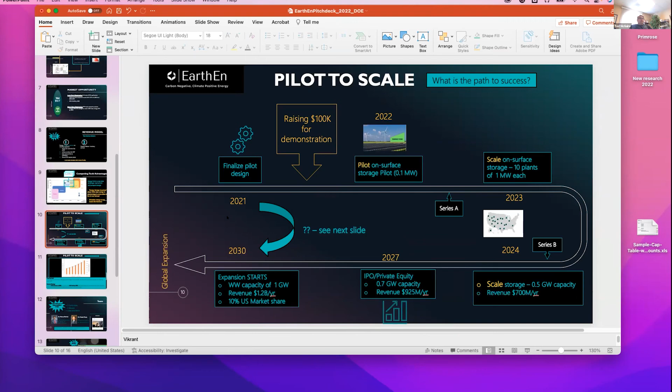Gotcha, okay. Looks like we have Nathan Dracobli's team. Okay, I see Nathan is here.

Fantastic, okay cool. Hi, so my company is called Invico. I'm an undergrad at Washington State, and my teammate, he can't be here right now, but he's a current undergrad at Colorado. Yeah, nothing more to be said really about that.

So basically, the basic problem—I think everyone's familiar with carbon emissions, that's a big problem—our approach is more of an individual level approach. One of the first problems we have is that measuring someone's carbon footprint from an individual perspective is very time consuming and very complicated.

And then going carbon negative on top of that is very expensive, and changing your habits is very hard. So our solution is basically we want to create an application, mobile first probably, where someone can take their financial footprint, looking at their assets, their real estate and individual transactions, and give them a carbon footprint score based off of that. The real benefit of that is it's passive, and there's no work needed beyond the initial setup.

And then the big idea paired with that is offering these tradable, tokenized sequestered carbon assets. The idea is we would create an asset backed by carbon that's tradable, and get people to perceive this as a store of value that's competitive with traditional stores of value like cash and gold. Obviously, there'd be differences between them. But the idea is you wouldn't be exposed to carbon markets as an individual, so it would be useful for offsetting while maintaining that stored value.

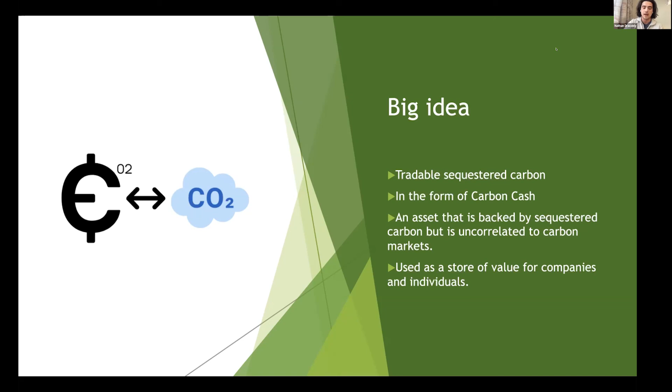And then with that carbon financial footprint, the core value proposition is obviously the passive carbon tracking, and then this carbon negative idea via the tokenization. But also, since we'll have all this financial data, our hope is that we can use it to assess credit risk for individuals in a different way compared to the traditional models, and that can give us a competitive advantage over traditional banking.

Probably the most direct competition is Aspiration and Joro. Aspiration's a banking thing, but the key thing is they're startups measuring carbon footprints. Then there's the traditional model, and there are also these AI credit risk adjusters like Upstart. Our thing is combining all these factors and making it very easy for individuals to make these choices. Our business model is transaction fees, then with credit cards, advertising, and eventually loaning, using our models.